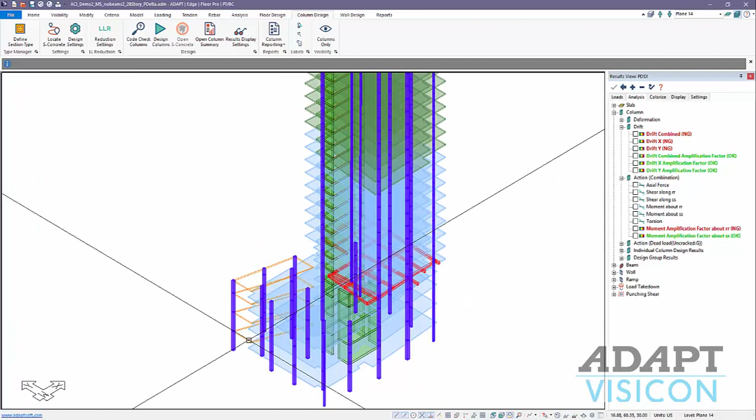We're going to go ahead and go to loading. Under load combinations, a user can now designate a combination as p-delta. In this example, we have 3 p-delta combinations listed here. There's a new analysis and design option type for p-delta, and you can see that here in this pull-down list.

The program will process p-delta combinations either as a batch, when you have repeating combinations, load cases included in those combinations and factors. So for example, we have PDM1, this stands for p-delta master 1, and this has factors of 1 for all of our gravity load cases. P-delta SX is for seismic in the X direction, and SY would be seismic in the Y direction as a simple example. Those also have the same identical factors for the gravity load cases. The only difference is they also have an extra load case included, 1 times EQX and 1 times EQY.

Because these 3 sets of factors and load cases are identical, this first combination is designated as a master combination, meaning the program will generate a geometric stiffness matrix from that combination and then apply it to the solution for these 2 combinations.

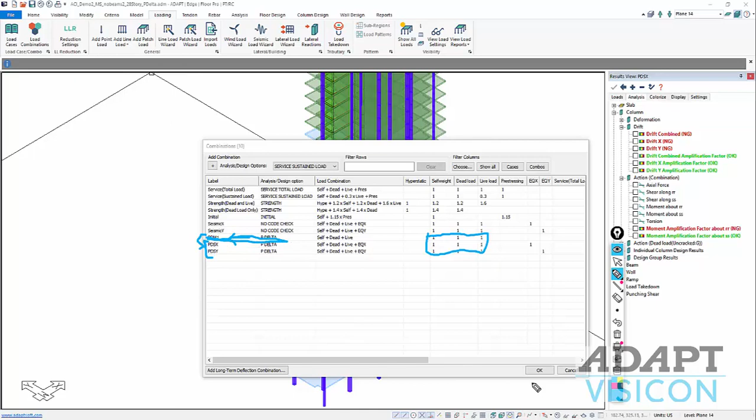If you want the program to uniquely solve each p-delta combination separately, we would remove the master combination from the list, and we would only solve for p-delta SX and SY. Each would allow the program to solve its own unique geometric matrix and then produce a solution for these 2 combinations. So these 2 combinations are sourcing this combination for the production of that matrix.

In designating p-delta as the combination, the program does not design design strips for p-delta solutions. Those are suppressed. The user can evaluate analysis results, which we'll talk about later, for p-delta in terms of drift amplification, and also moment amplification for columns. The user can design columns and walls relative to p-delta solutions.

So we've talked about how we set up second order p-delta analysis combinations. The next thing we want to talk about are results that are generated for these combinations, and those are drift and moment amplification factors. We'll go back to our model. We've solved this frame for p-delta, and you'll note under the result browser in the loads tab, there's a new branch called p-delta, which allows us to select, just like any other combination, one of the p-delta combinations.

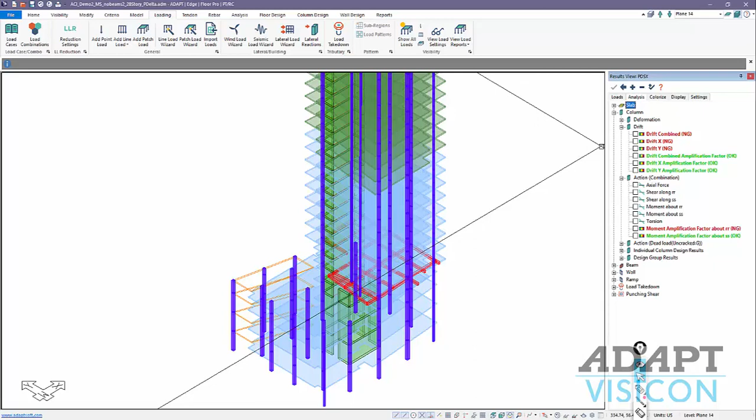For example, for p-delta SX, this is again seismic in the positive X direction following the global orientation for positive direction. If we select analysis, and I'm going to go over here to column design and look at only the columns, and we'll go ahead and go to single level. I'll navigate just to the top of the structure for simplicity. You can see for column results under drift, we now have options set for amplification of combined global drift, X direction drift, and Y direction drift.

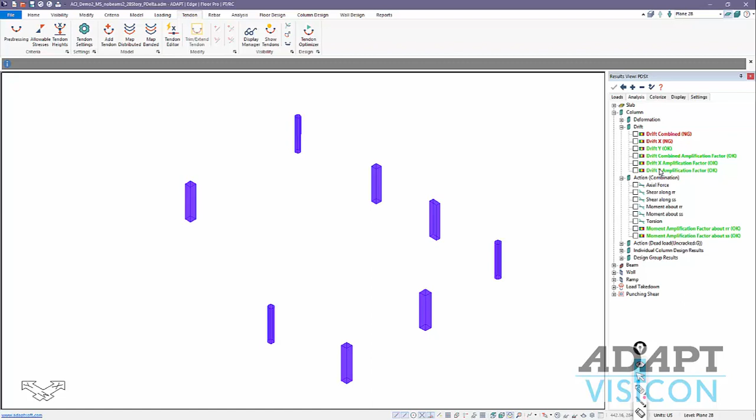The amplification factor is the ratio of the second order drift to the first order drift. So the program gives us an indication of that for each column, and it checks it against a user-defined value which is defaulted to 1.4. That can be modified both for drift and moment amplification in these 2 options here. You can see this is set to 1.4.

So coming back to the results, if, for example, I look at the X direction drift, the program will color code those columns which are acceptable and produce the maximum ratio relative to top and bottom displacements at the particular level for drift from second order and first order results. Those are just graphical results that can be had using these new options.

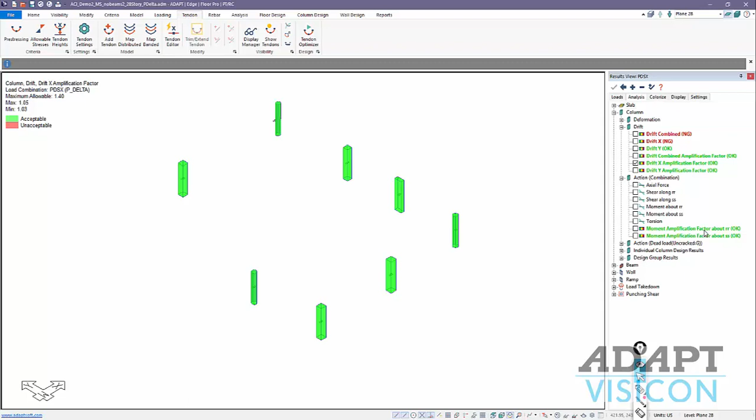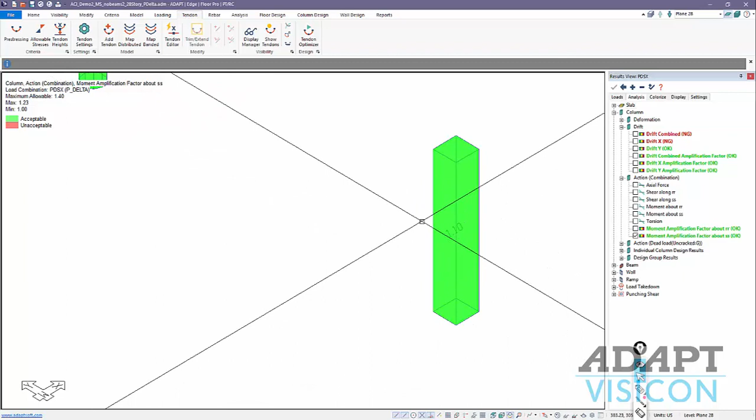Additionally, we have moment amplification factors about RR and SS directions. So the primary driver for seismic in the X direction would be bending about SS. We'll go ahead and turn that on, and we can see again we have moment amplification factors. The program produces a second order to first order ratio of moments at the top and bottom and reports the worst case here as a ratio. If it's greater than the threshold 1.4, it would be flagged as red. If we go ahead and turn on the entire set of columns, you can see amplification.

There's one location where it's flagging this as 1.44. If I go to the other direction and just zoom out, there are additional locations that are flagged. These are, again, just graphical results relative to those p-delta combinations.

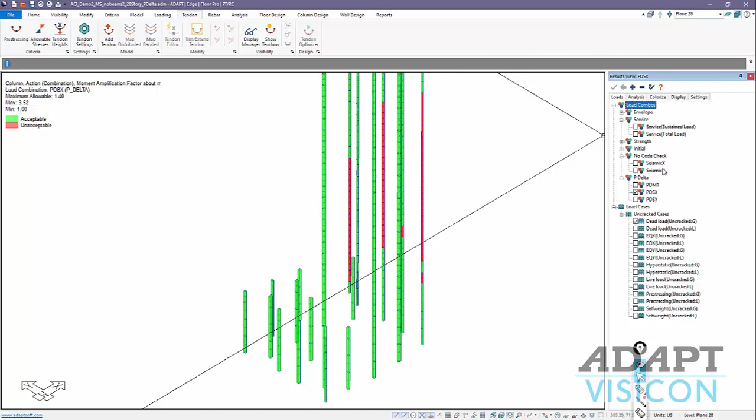If you select a combination that we would consider a regular combination, for example, under no code check, we produced essentially the same repetitive combos but without p-delta. If we turn those on, you can see these are grayed out and the check becomes not applicable in the result tree. We're going to go back to our release notes document.

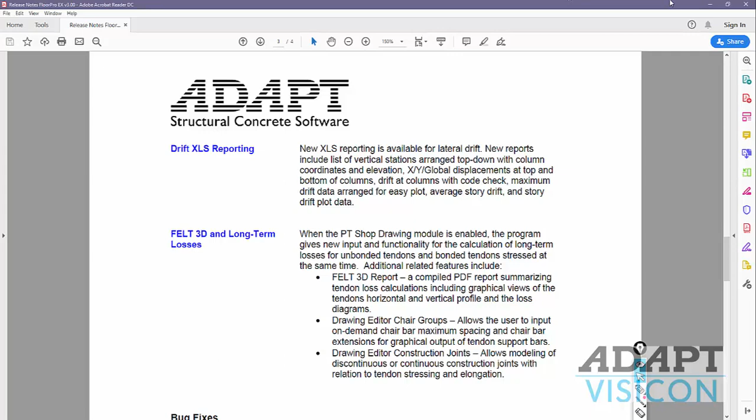I'm going to jump all the way down here to this option for drift reporting. This is linked to p-delta and just drift in general. In the program, if we have run a global frame and checked drift graphically, there are also new options for drift output in XLS format. Under reports, analysis data, under drift report, the program opens a dialog.

You have the ability to select the combinations you want to produce a report for. In this case, I'll produce it for just one combo. We'll do this for the p-delta in the X direction for seismic. And we can also input our allowable that we want to check against within the XLS report. This has no linkage back to the graphical report; it's only produced for the XLS report. And then the amplification factor, again, no linkage back to the graphical check.

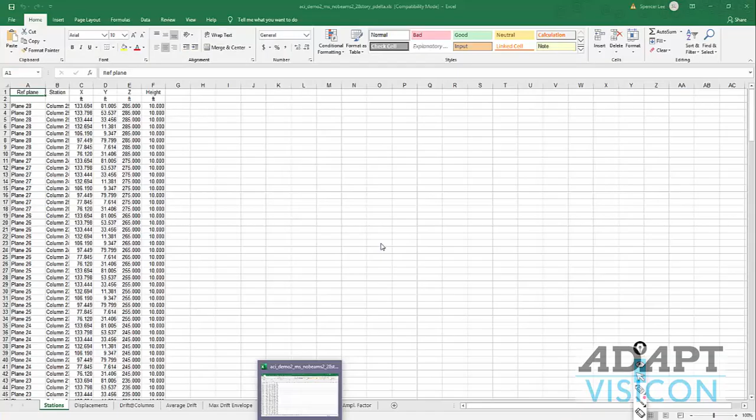If we select the direction, we can look at unidirectional results, X and Y separated, or combined results. We'll just look at all three. I'll select OK, and the program will launch a new XLS report. Okay, and this is the report. There are several different sheets here. I'll describe each just in summary.

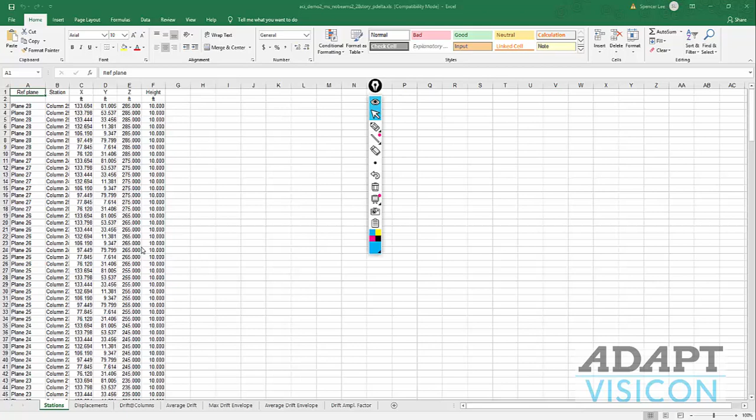We have stations which are referenced from top to bottom in the structure. So this will list all of the columns at each plane and the column coordinates along with the heights of those columns. This is a good reference if you needed to pull out coordinates of those column locations aside from just the drift reporting. The program also reports displacements for each of the columns.

So you can see for each plane, each column is listed, the load combination is listed, the type and designation, and then we produce the displacements X, Y at the bottom and top, as well as the combined displacements. These are just raw displacement results for the combination that you had selected.

Drift at columns: the program will show drift in X, Y, and combined in this case for the same combinations and the same column locations and the percentage. So this is the actual interstory drift, the differential drift for the direction or combined. This is the percentage relative to the story height, and this is checked against allowable. If any of these three exceed allowable, the program will flag it as no good, or okay if it's less than allowable.

The average drift takes the average of all columns at a level, so the program would report that per plane. You can see we have planes 2 through 28. This is again X, Y, and combined, the percentage relative to the story height, and then the code check versus allowable. Maximum drift envelope: this will just produce the report of the maximum drift in the X, Y, or combined direction against allowable.

Average drift envelope: again, we look at a reduced report for the average drift of all columns in the story. And then we look at the drift amplification factors. So for each column location, we have a percentage of drift amplification against an allowable. This is just a tabular format of what you might check more formally in graphical form.

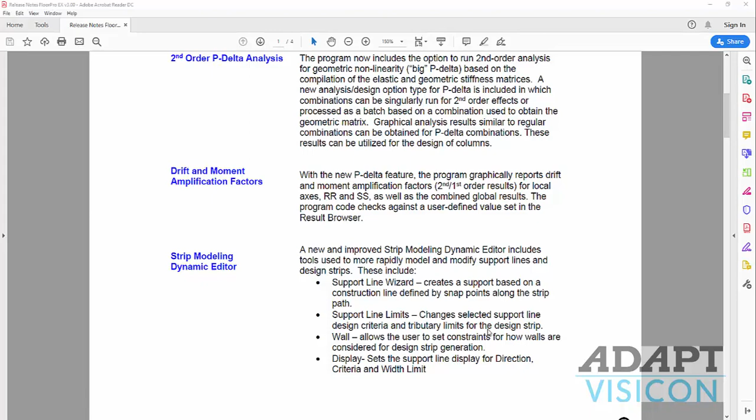We're now going to switch gears and talk about the strip modeling editor, the dynamic editor, and how that has been improved. We'll also talk after that about splitters, how splitters are now redefined and used to allow for more efficient creation of design strips. So in this model, I'll go ahead and reset the view. We're going to go to single level mode, and I'll work down here to level 3, for example.

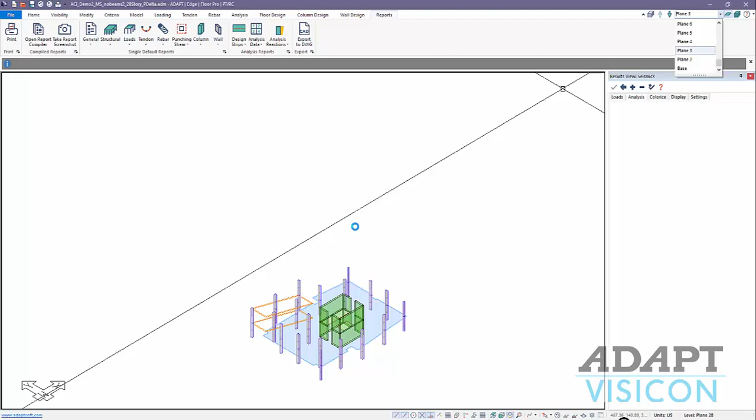At level 3, if you import a new or an existing file into the new program, our recommendation is to remove all splitters from that file. Leave your support lines, but remove splitters, because the definition and the use of splitters has changed quite dramatically from previous versions of the program. So in this case, we're going to go ahead and just delete the design strips.

I'm going to turn on my splitters, and we're going to go ahead and select by type. I'm going to remove the splitters and the support lines. We're going to show this dynamic editor just in pure form, using it as if this was a newly created model.

Okay, so we'll go to floor design. The new tool is located here under strip modeling as dynamic editor. Now the user can always generate design strips in X or Y directions using X and Y tools. This is similar to the previous version. You're not required to use the dynamic editor.

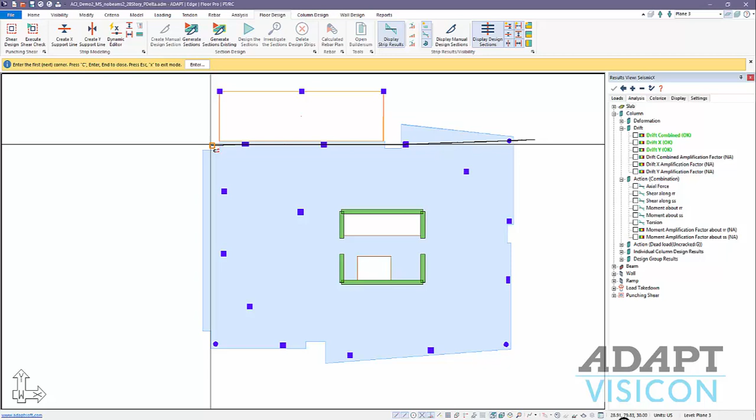For example, I can select X. I can go ahead and just create a strip like so. The program, in this case, since I started and ended the support line outside of the slab, it leaves that point there. So you may have to edit that if you want it to be a cleaner entry of the support line. I may have to use the snap to endpoint or snap perpendicular to pull those lines back. Okay, so these two tools work essentially the same as what you had in previous versions.

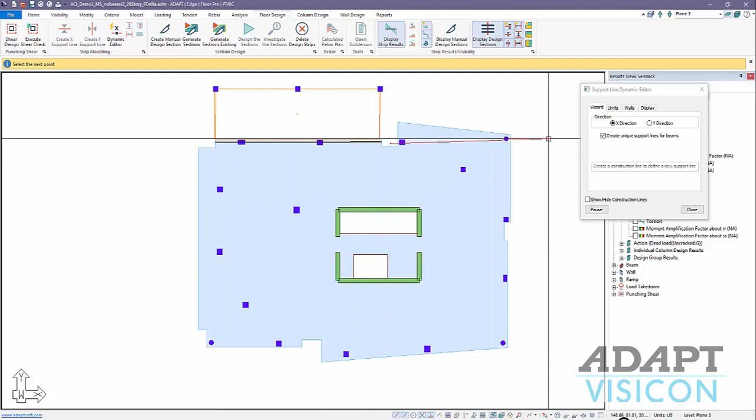If I now use the dynamic editor, there's 4 new tabs in the editor. We're going to start with the wizard. If we go to X direction, we're going to start here using our construction line, and as long as that goes through a column, it will scan and pick up that point as part of the strip. So if I end it here and press enter, it will truncate the support line to the slab edges and reduce it back. Same here, and notice I'm kind of just picking between the columns.

Here I can put intermediate click points to change the direction of the construction line. If I click on the endpoints or near the endpoints of walls, it will scan that and pick up the 2 endpoints of walls, like so. I'm going to go ahead and just add one at that location. If I click near the endpoint for a perpendicular or a wall in the opposite direction, it will pick up those points also.

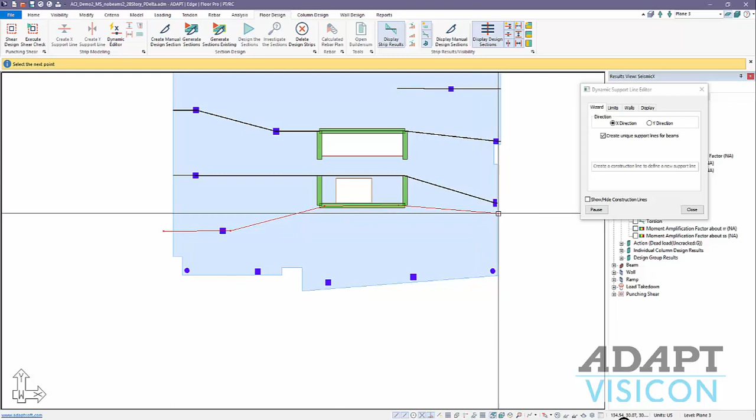Now notice what happened here. This ended the line there because I terminated that point. I'll pause it. I can just delete that. I can resume. So this pause resume gives you a nice capability of modifying support lines if you make a mistake. And then we have something maybe like this. Finally, we'll do 2 more down here in the X direction, like so. We're going to go ahead and close that for just a moment.

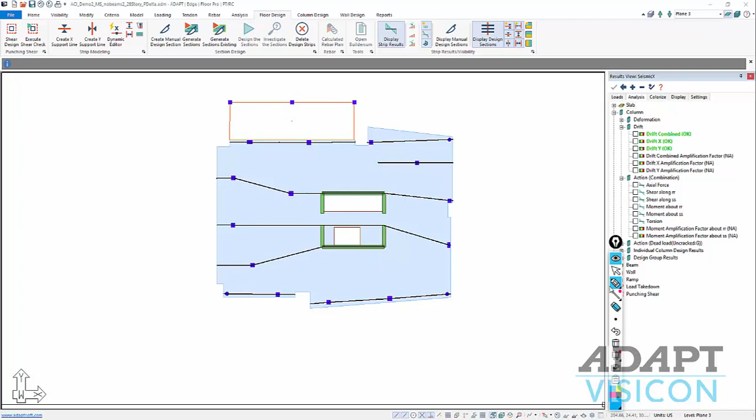Now, in previous versions, we would need splitters at a few locations. We would need splitters likely here. I would need a splitter wherever our support lines stop inside of the slab region. We would need these splitters, and then we might need splitters to bound off these openings. So we'll go ahead and leave all splitters out of this. I'm going to generate the design strips, and we can see the program can now more intelligently detect where the support line starts and stops, and it can produce the strips without any need of splitters bounding the edges, start and end of a strip.

One thing that the splitter is useful for is being able to terminate the width of a design tributary based on just a simple input of a splitter. For example, I don't want this to extend into the opening, so I'm going to add a splitter just here arbitrarily and maybe there. We'll go ahead and delete the strips. I'll use my X splitter. I'm going to add a splitter there, and I'm going to add one here. Once I'm done doing that, I can generate the strips again.

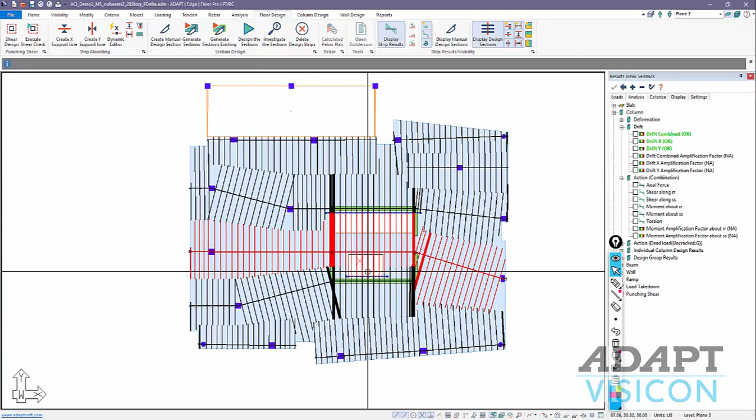And you can see this strip, because it goes through this region, extends down to the splitter. This strip extends up to the splitter, and vice versa on the other side. Okay, I may need to add 2 more splitters to completely release the strips from extending over the openings. But again, the splitter input is quite simple. If we go ahead and just add 2 more splitters, maybe I add one here, and I add one there. And now we have a nice arrangement of design strips in the X direction.

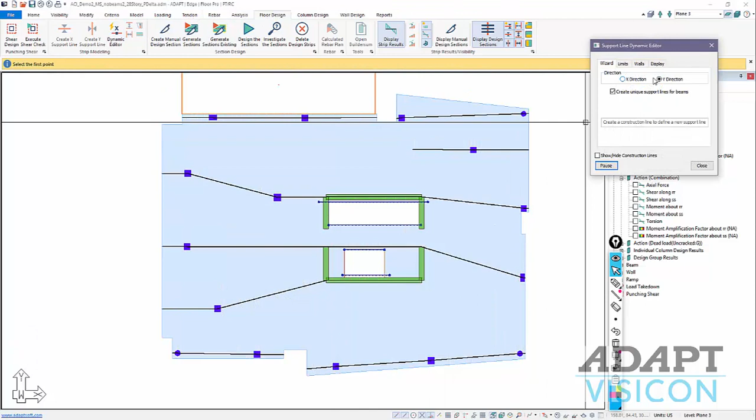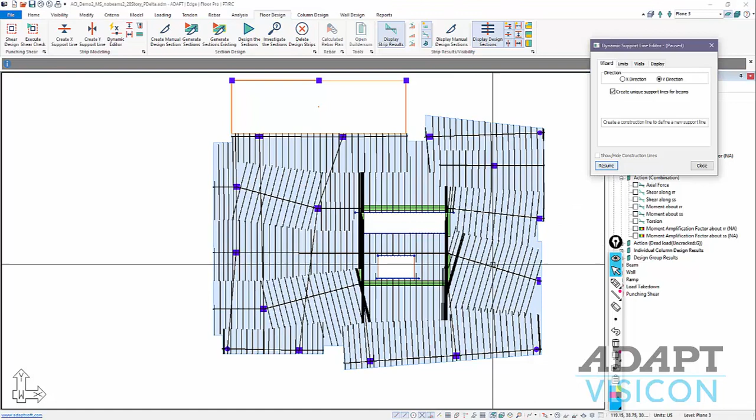I could come back to the dynamic editor, and I'm going to now do the Y direction. So the Y direction might look something like this. I'll snap near this point, near that point. Same thing here, near one endpoint, one on the other side. And again, here I did not continue, so let me go ahead and make that modification. I'll just delete that. I'll resume. This is point 1, point 2, and let's say point 3 and 4.

And then we might have one along there. I'll close that. Now we don't need to see the X direction splitters here, so I'll go ahead and turn the splitter view off. I may want Y direction splitters, so I'll preemptively add those.

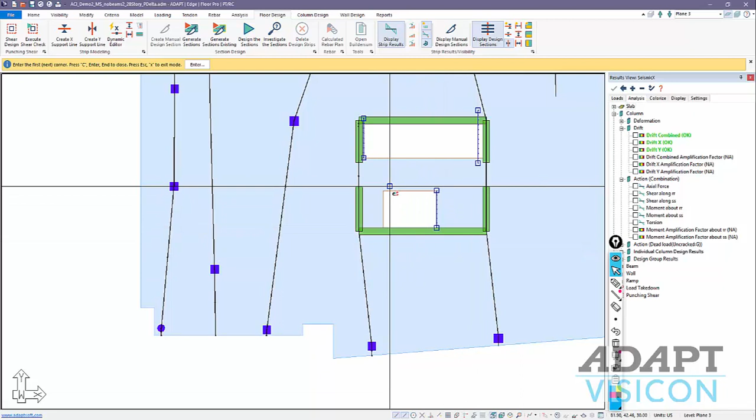We're going to add one here. I can have more precision if I use snap tools. I could maybe add one there, closer to the wall. And if I use the actual points of the opening, I can get quite precise in where the splitters are placed, something like that. We'll go ahead and generate the strips.

After producing those strips, we'll just isolate this Y direction, and now we have design cuts that look like so. The new strip tools are very nice and very easy to use for generation of strips more rapidly than previous versions. One thing to note is if I was to close this model and reopen it...

We're going to reopen this in RC mode. Okay, we'll go back to level 3. And if we go to criteria under analysis and design options, we notice that for conventionally reinforced only RC slabs, the middle strip option has been removed.

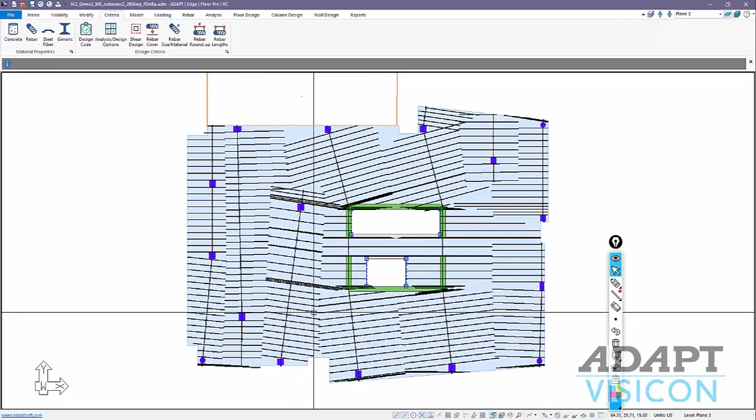This was required to allow the new functionality to work as intended during the implementation. So for middle strips, the user would have to actually create support lines for those middle strips manually. But with the new wizard and new ability to do that, it can be done quite rapidly, so that functionality will likely be restored in a future version, but in this first release, that functionality is removed.

So if I, for example, wanted to add middle strips in this X direction, I can very easily do that again using the wizard. I could just create strips like so. There's middle strip 1. We might have middle strip 2 there, maybe middle strip 3, 4.

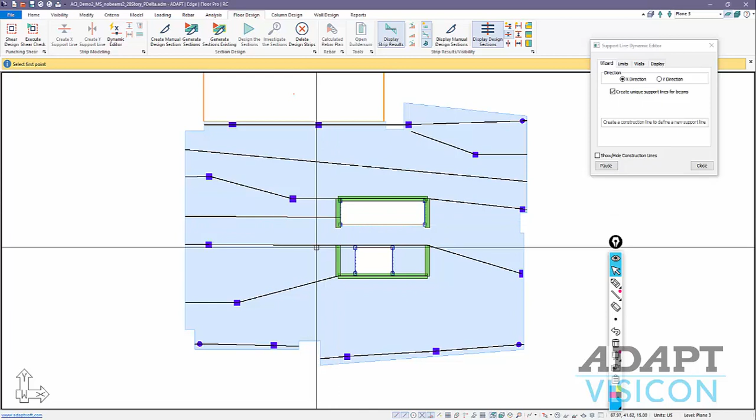There's 5, and there's 6. In doing that, we get some layout of strips that may look like this. So middle strips can be done using the wizard, or again manually through creating X and Y direction support lines.

We'll go back to that dynamic editor, and the second option in the editor is limits. The program allows us to modify support line designations more quickly versus just going in and double clicking on a support line and changing the modifications there, so we can modify design criteria.

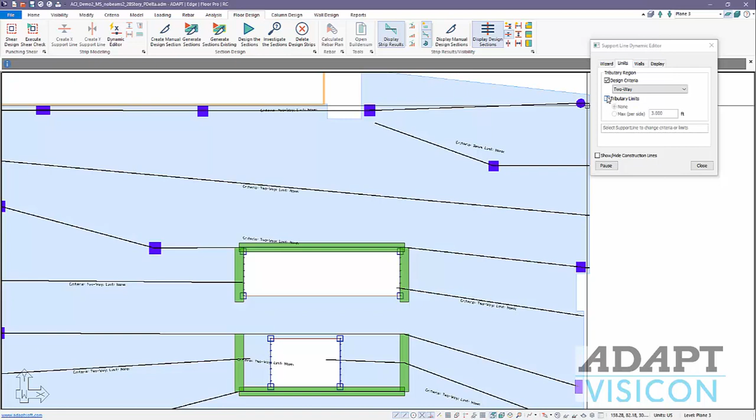For example, if I wanted to change this to one way, I would just change it through clicking once, selecting this option. You could also window select, so this gives you a little more control over modifying more than just one support line. You can also define tributary limits using this window, as well as a double click.

If I pause this and double click on this strip, these same options for tributary limits are shown under Design Section Options. You can see a few new things here. Number one, the program allows you to either enter the maximum number of sections per span or generate a maximum section spacing with minimum number of sections, which is the new default.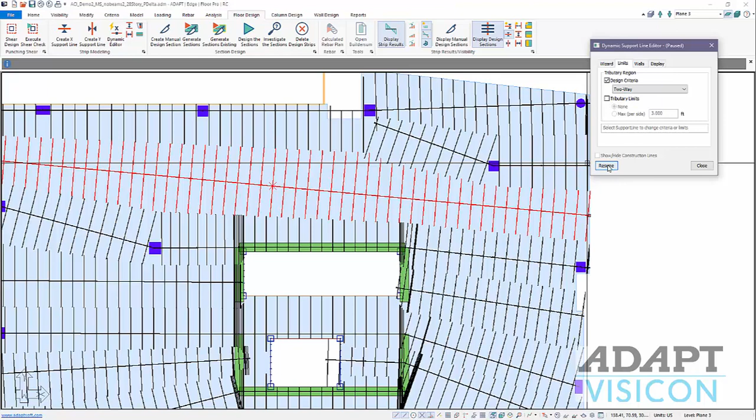Tributary width limits - if you wanted to limit the tributary per side, maybe I want to limit this particular middle strip to 2 feet per side, I would set that here individually, or I could set it through this option here in the dynamic editor.

If we go back and generate the strips again, and I'll isolate that X direction, you can see that's been limited to that value. This does not stretch down, we just simply limit this to this particular value.

Now if I put a splitter along here, the program interprets that splitter. So if I just say, well, I want to add a splitter along this path and regenerate the strips based on the splitter and that input for maximum tributary width, now you can see this cuts down to the splitter, this cuts down to the splitter, and this 2 feet still is imposed on that support line.

I'll remove that splitter and let's set this back to none for the tributary width limit, and we'll just regenerate again to restore what we had previously.

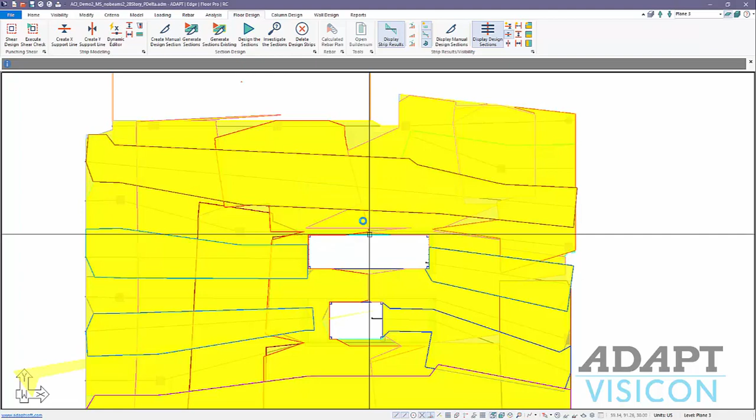Okay, coming back to the dynamic editor, the third option here is walls. How do we go about generating section cuts near walls? You can see that there's some auto options here that are already set. This is pertaining only to the wall as how it's defined in terms of a boundary for design strips.

So for example, this line here says it's a Y only boundary. I want this to be an X boundary. If I change this, for example, to X boundary, I'll just do user defined. I'm going to go ahead and click on that wall as an X boundary, and I'll close it.

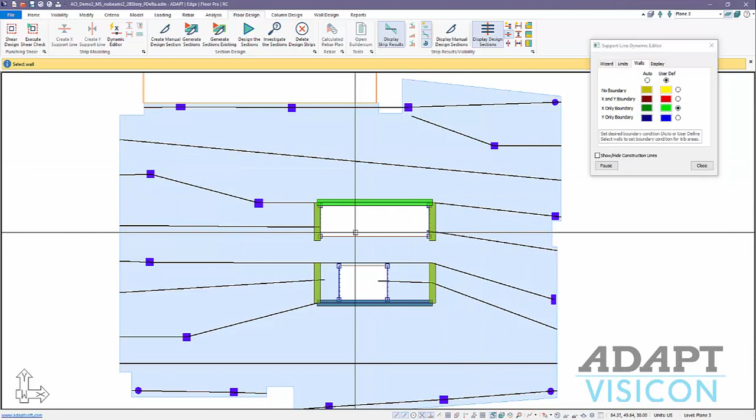If I generate the design cuts, this is a mechanism used to allow the program to generate strips and how they interact with walls. You can see this design cut here extends all the way down to the newly imposed X boundary, and there's a tiny gap between those. This allows us to control how support lines interact with walls, so that we may not want the support line section to cut over the wall but just go right up to the face of the wall.

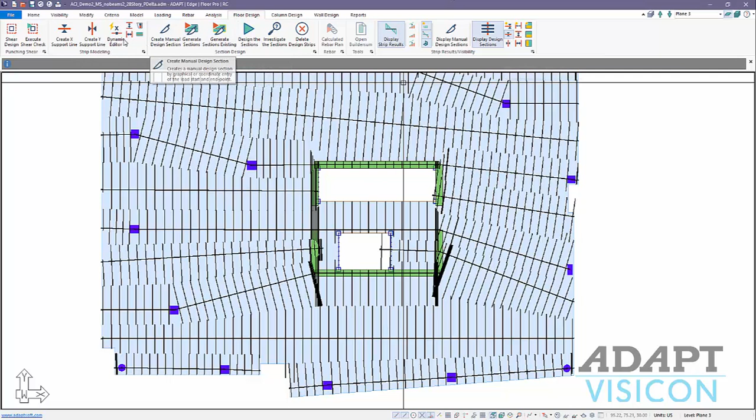So this allows control over that type of arrangement. If we go back to our assignments here, if I want that to be an X and Y boundary, we'll go back to user defined. I want this to be X and Y. I'll click that, that changes it to X and Y.

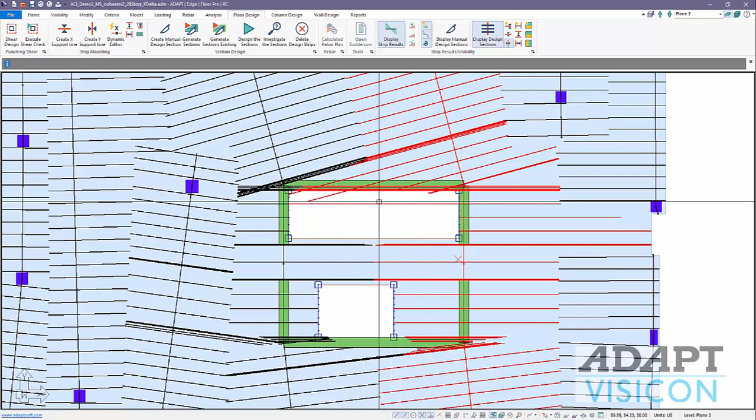Now if we look at the other direction, these design cuts that extend over this wall are now going to be trimmed back, because it's also being used as an imposed Y direction boundary based on the rule that I assigned. So I can generate this again, and if we isolate the Y direction, you can see these cuts along that wall get trimmed back against that wall.

Let's go back to Dynamic Editor. Again, this just allows you to control wall boundaries. If you don't want any boundaries for walls, you can always go through and just tag all of the walls as no boundary. Otherwise, the auto assignments would be generated. You can see there's a few no boundary. This, for example, is currently no boundary. This is currently user defined as an X and Y boundary, and then this is defined as a Y boundary only. So the last thing is display.

We can simply control display of properties of support lines using this option. So I can display the criteria, direction, limit, and if you update, it just shows us those different values on the different support lines. So just easier ways to control visibility of characteristics of a support line versus double clicking and having to go into the properties of the support line.

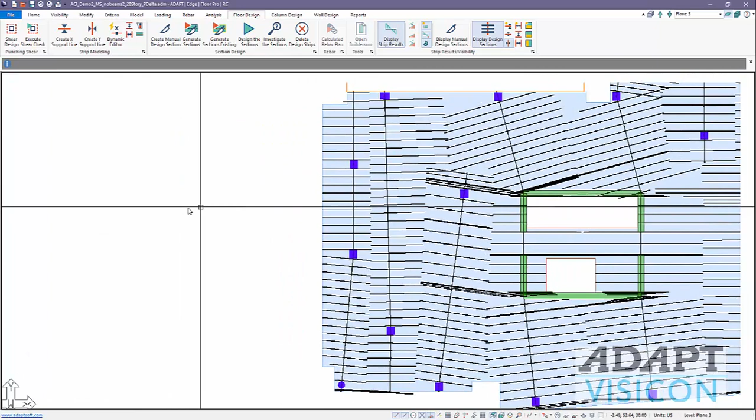One additional thing to point out regarding design strips is beams. How does the program treat beams when we use the dynamic editor to snap on beam locations? So we're going to add a beam along this line. I'll go over here to model and we'll just say I want to add a beam from point A to point B, and I'm going to delete this strip.

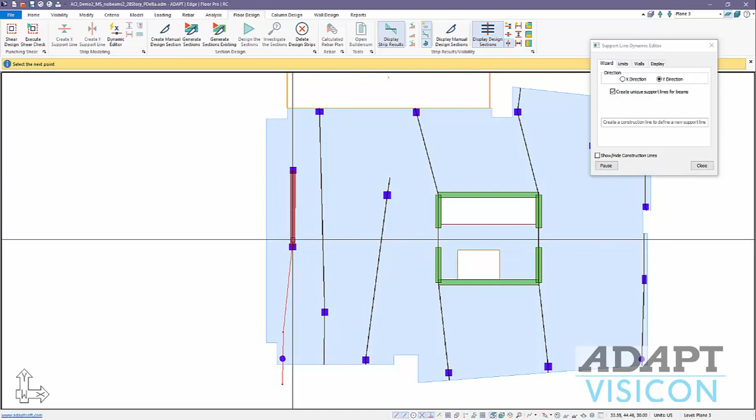I'll delete out the design strips for the model, and we want to talk about how this beam is treated using the new options for the dynamic editor. If I use my dynamic editor, and let's say I go from through this column, through that column, back through that column, and then over to the edge, and I'll just close that, you can see this is a continuous support line, and it takes on the characteristic of a two-way slab by default.

So we would have to rely on previously implemented mechanisms to design that beam. The program recognizes that there's a beam there. It will design it according to beam requirements per code, but all of the reinforcement that's linked and used for the design of that beam, the sizes, are based on whatever settings we have under the criteria options for rebar size and material. So two-way slab, we have 5s and 8s.

For beams, we actually might want to use number 9s, for example. So the program, again, designs the proper amount of area of steel, but the rebar assignment to the beam takes on the characteristic setting of a two-way slab size, these sizes here. If we want more explicit control of that being labeled as a beam, we can do that using the new editor.

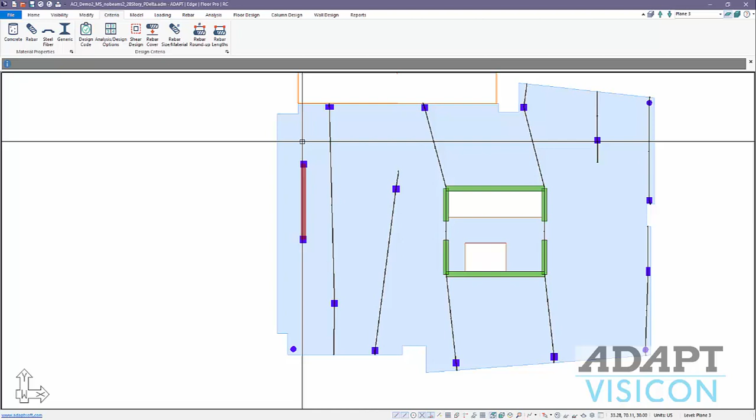So I'll go back, and now I'm going to go ahead and just snap near the endpoint of the beam, like so. And in doing so, the program automatically breaks this up. This is now a two-way slab. This becomes a beam, and then we have a two-way slab. Okay, the beam characteristics can take on

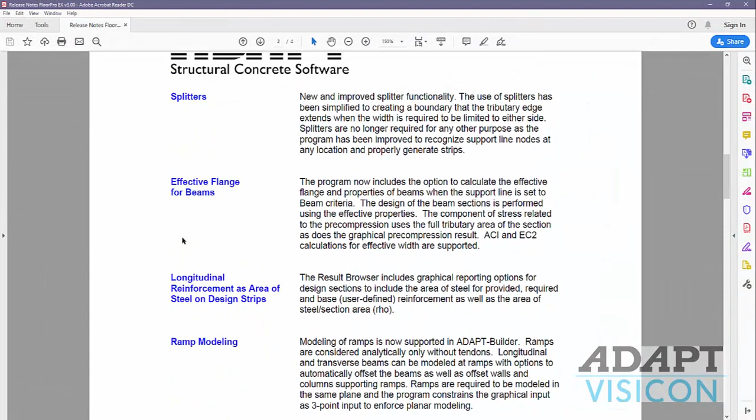two additional options here. When we have a beam, we now have the option for effective flange width as beam criteria. So we've talked about the dynamic editor, we've talked about splitters. Now we're getting into the effective flange for beams. You can see this option here for effective flange that we just showed under the properties of that beam.

Now to fully explore this, we're going to actually go up to level 6. This beam here, we've just manually created the X support line. We've labeled it as a beam design, and we are going to use the effective flange width option. What does this do? This allows the program to use the effective properties for the calculation of reinforcement for the design cut, as well as the stress component, the top and bottom flexural stress.

If we look at simple bending theory, we might say the stress is equal to M over S plus P over A. Well, the section modulus used, or I over Y used, are those based on the effective properties of the beam section when this is used.

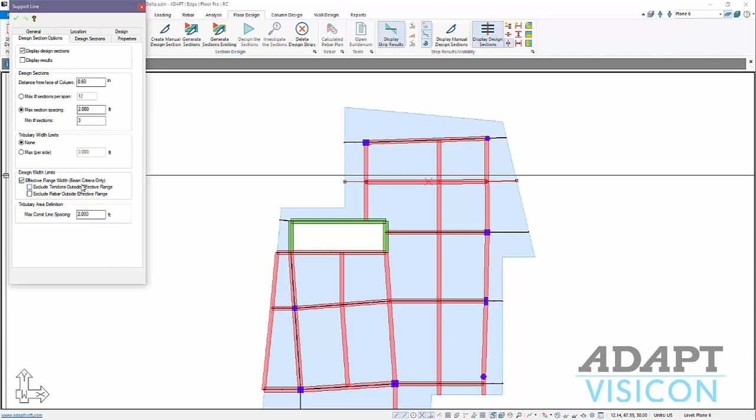The area is using the full flange based on the modeled design strip. Let's look at that a little bit more. If we generate the strips, we would consider this width from here to here as the full tributary, full T.

When we design that strip, if I take that strip and design those sections, the properties used for that particular section cut are the effective properties, not the full properties. That's reflective in the dialog that shows us the section cut properties when we design a series of sections linked to a support line.

Coming back to this design strip, under design sections the length is set to 162, and B effective is also 162, with a bit more precision reported. If I go back to design section options, we need to make sure that's updated before we apply it. Once updated, let's design again to see the reflection in the properties dialog.

Coming back to that, you can see now the physical cut is 162, the effective flange is 122.8, and this follows ACI and European code implementations of effective flange. Those are outlined in more detail in the new features supplement manual, which can be linked from the help menu up at the top right.

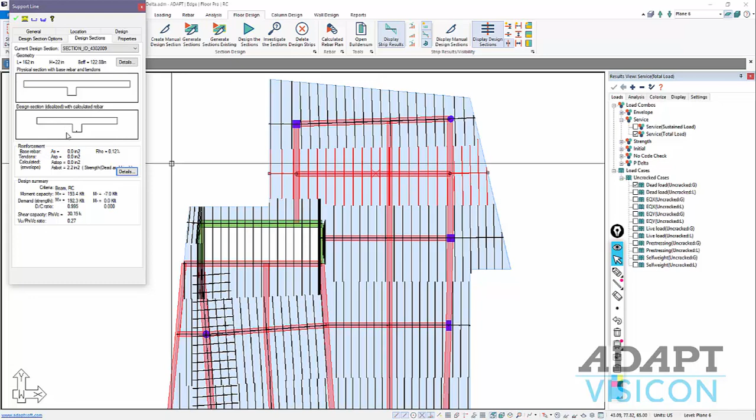As the user, you can also designate whether or not you want to exclude or include the tendons and reinforcement for the design of the section. So any reinforcement or tendons that physically fall outside of the effective width can be used or excluded depending on the user's input. By default, we include them, and the user can control whether they are excluded using these two selection boxes.

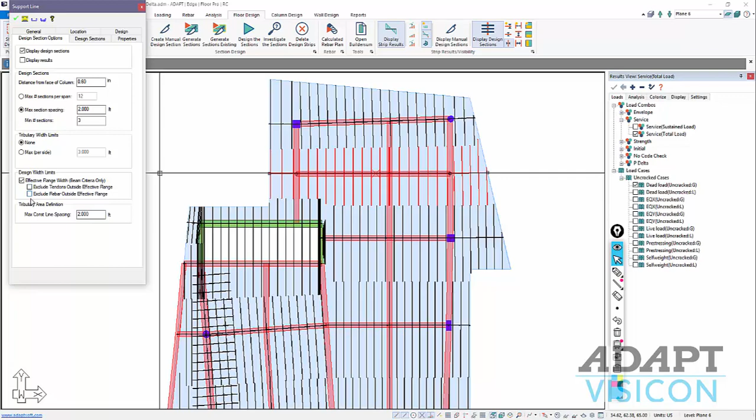For design strips, the program now reports graphical area of steel. That's this option here, longitudinal reinforcement as area of steel. In the program, this is represented through use of the result browser.

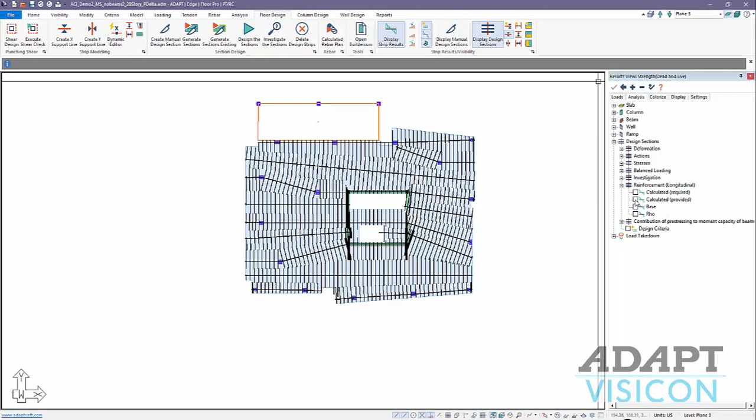If we select a combination, for example strength, dead and live, and we've produced the rebar plan, we've already calculated the rebar for that combination. We can now review calculated as required, calculated as provided rebar, any base reinforcement, and then the area of steel. For example, the required rebar for strength, dead and live is represented by these graphs—green is top rebar, blue is bottom rebar.

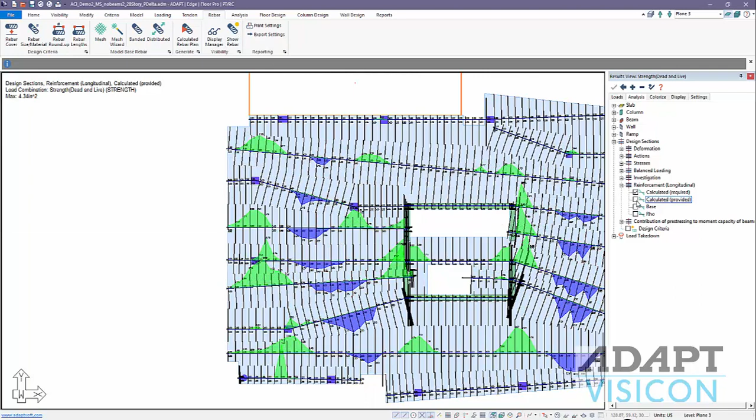If I turn on the calculated rebar plan, let's go to rebar and display it. This shows us the actual bars on plan with the graph, so those should match in terms of location. If we go to provided rebar, this is what the program is actually adding as provided rebar in that section. There may be cases where the required rebar and the provided rebar contain a gap.

Like here, we need 1.58 provided—that's what we're adding to the slab—and we only need 0.9. That means minimum reinforcement may actually control at that particular location. We can also, if we have any base rebar, show the base rebar and also the percentage of steel as a function of the section area along these graphs.

The next two features we're going to discuss are ramp modeling and also beam offsets. This is a necessary improvement to support beams that are modeled at ramps. To do this, we're going to create a new instance of a model.

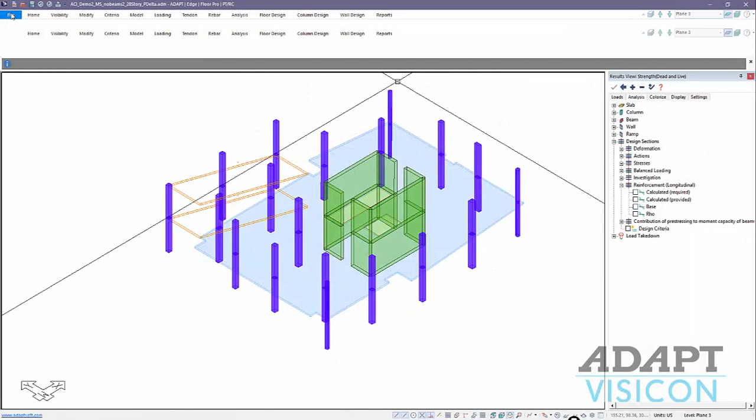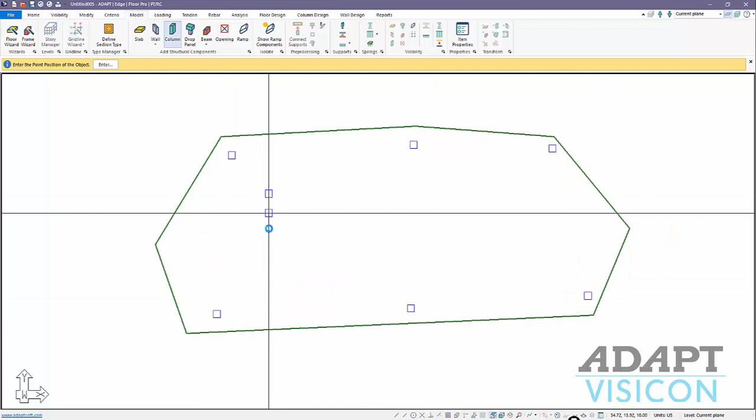Let's go and create just a simple model. I'll model just a slab and a few columns, and let's say in this we're going to have a ramp, maybe that goes from there to there. We have the ability now to model ramps using this option found in Model, Add Structural Components.

So this ramp starts at these two points, these columns here—point 1 and 2—which define the top of the ramp. The third point I'll say is here, and notice once we select the third point, this becomes locked. That allows the program to maintain just a planar ramp, which is a limitation where we have to model these as planar elements. So this becomes our ramp component.

I'm actually going to move that column there, and I'll move this one just to the midpoint of the ramp, and this one also to midpoint.

Okay, so we have this ramp element. A couple of things to note is under visibility, we can see the ramps if we go to a solid model. The program does not cut out the slab over the ramp. That requires us to add an opening.

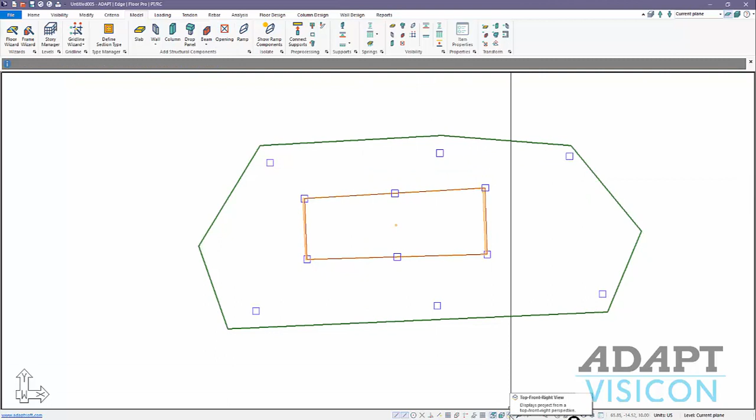So we'll add an opening right on top of the ramp, like so. If I use the 3D view option, top, front, right view, this warning will appear saying the view may not show the overlap of the ramps properly, so you may have to go back to the rendering. Looking at our rendering, we have something that looks like this - it's just a simple ramp.

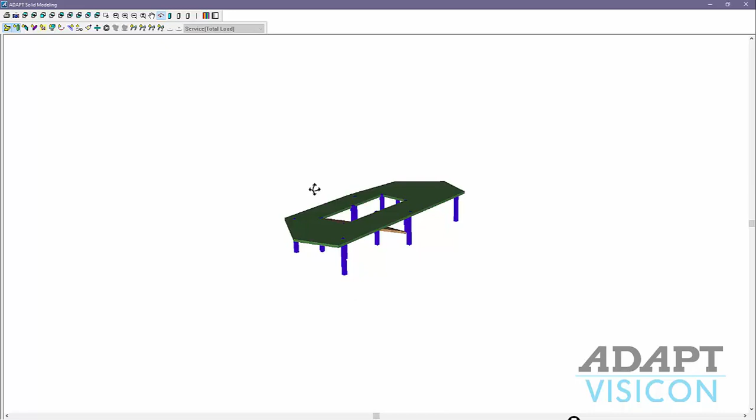And it may be required for continuity of a lateral system that's a moment frame, versus using workarounds that might be more applicable to earlier versions of the software. So we've modeled this ramp.

A couple of other things to note: any beam connected to the ramp or column can be offset downward and connect automatically to the ramp. So if I model, for example, a beam along here, let me make sure that snaps. And if I go back to my 3D view, that beam is actually modeled at this reference plane. If I select the beam, there's a new option under pre-processing that connects with the ramp, which drops that down to the level where it should be intersecting with the ramp, like so.

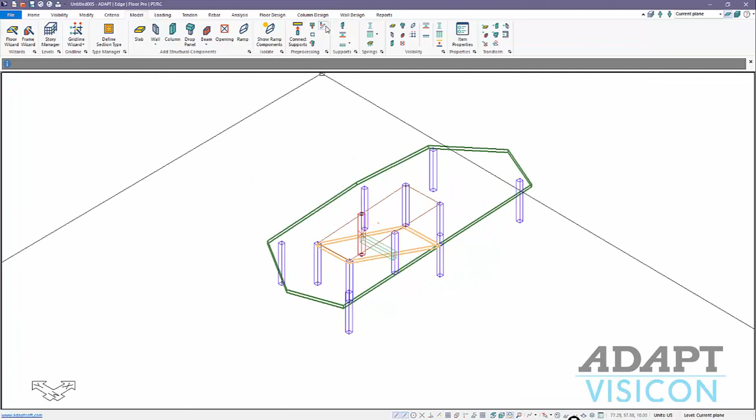You can also drop columns down. So if I select, for example, this column and I use connect with ramp, this column would drop down as well.

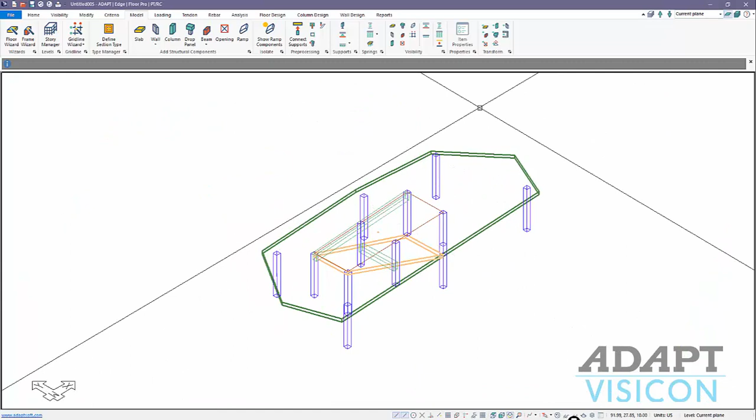Okay, we can also model longitudinal beams along the length of the ramp. If we had a beam, for example, that went from here all the way over to there, and coming back to this 3D view, that's also at the active plane, which is the current plane in this case. I can select this and align it with the ramp.

Ramps can be copied just like any other component. If I select all of this, I can copy that using modify vertical copy up one time, and we now have two ramps, basically identical slabs. Let me make sure I'm in multi-level mode to view that, like so.

The ability to slope columns, or beams rather in this case, requires the ability to support offsets at both start and end point of the beam. So for location, you now have the ability to model beams really as braces. You could apply this to something other than just ramps - you could have a sloped beam member in a model using these offsets.

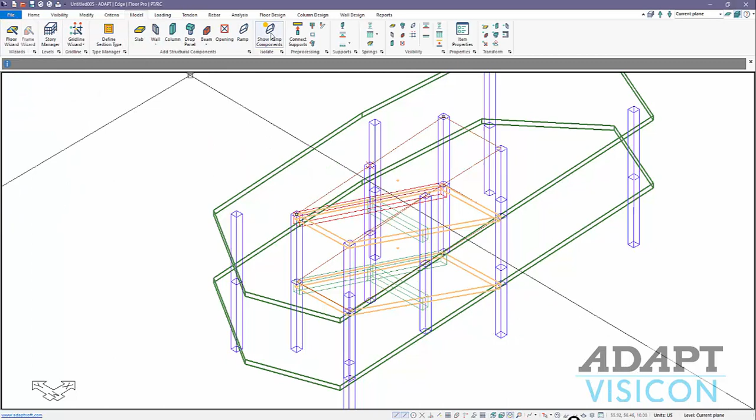Okay, back under model, there's a third option relative to ramps: show ramp components. If we go to a single level, for example, this simply just shows the ramp components in isolation and connected components. I can always go back to the default display using this option. So that isolates ramp components for viewing if you needed to quickly review how the ramp looks or how it's modeled.

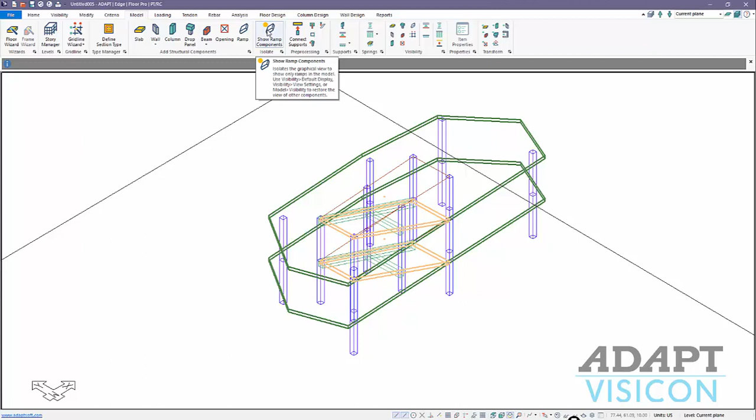Now, for ramping, ramps number one cannot be designed - we can't add a support line and design the ramps - and also tendons cannot be modeled in ramps. So those are two limitations relative to ramps. It's important for the user to understand how that applies to design strips.

If we look at a section cut this way, that might lead to geometry where we have the upper slab and then the ramp slab. And when we combine this plus this into an idealized section, we may actually get something that looks very deep - it's just a solid chunk of concrete.

So it's advisable for the user in this case to add splitters. We showed earlier in the video how splitters can be used and modeled very easily. I would just add a splitter along this, just slightly inside the ramp, there and there, or right on the edge of the ramp. And that isolates this area from containing any portion of concrete as part of the section cut.

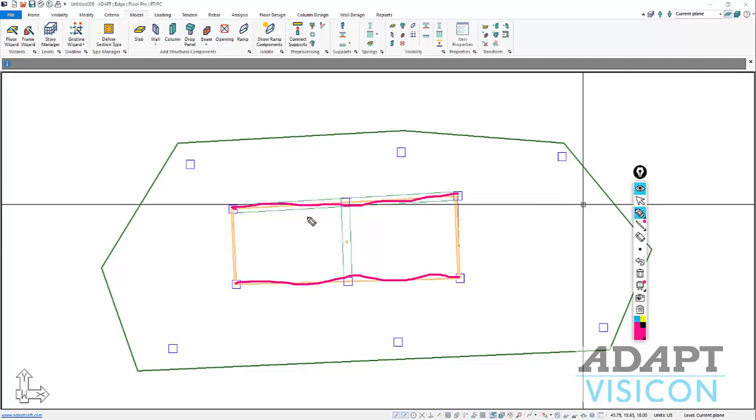In future versions of the software, we will add the functionality to design ramps. In the current implementation, their main purpose again is just for an analysis element, mainly for continuity of a lateral system. If you needed to include a more precise way of modeling ramps, we now have this component.

There have been two new major improvements made to punching shear for Builder 2019, and these mainly include the ability for the user to check critical sections based on an octagonally shaped boundary or critical section. We have some code references here outlining this. For ACI, this applies only to ACI in the current implementation - all versions of ACI 318 in the program, that's version 14 all the way back through 99.

And we also have included the ability for the program to check the minimum number or minimum rails, studs, or shear reinforcement for purposes of seismic drift. Again, a code reference is shown here. We're going to now show how these are actually implemented in the program.

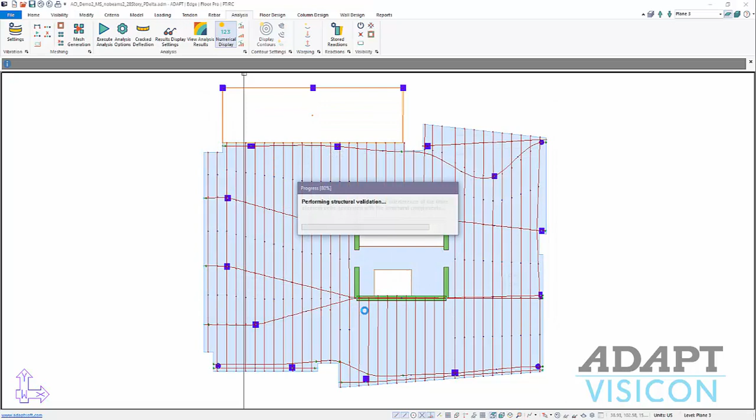We'll go back to our main model that we were using previously, and we're going to stick with level 3 shown here. This is a post-tensioned level, so we have post-tensioning shown. We're going to analyze the slab. So I'm going to analyze this just for one combination, strength, dead, and live, just to produce a result that allows us to check punching shear. Okay, we'll go back to our default display.

And under floor design, shear design, there are two new options, and I'll highlight these new options. The first option is to consider the critical section outside of the shear reinforced zone. The second option is to apply the check for minimum reinforcement for drift. I'll explain both of these now.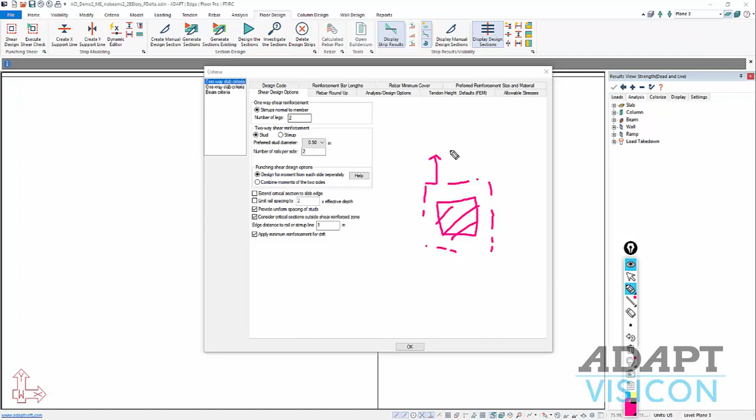For the first option, historically the program has checked a critical section that is rectilinear. So we have 4 straight sides. The program would check that out at d/2 spacing until you hit what we call a layer that requires no reinforcement. So maybe this is layer 10, and layer 10 yields the need for 0 amount of area of steel. Let's say that's the value for area of steel.

In the implementation with this new option of considering this critical section, the program determines that location. It then checks it a second time using the octagonally shaped section. So the program has input. If these are our rails, for example, this is an interior condition. These might be the stud rails. I'm just showing 2 for purposes of the demonstration. The user can enter the edge distance to the rail or stirrup line from the face of column. The critical section would then be based off of this shape here.

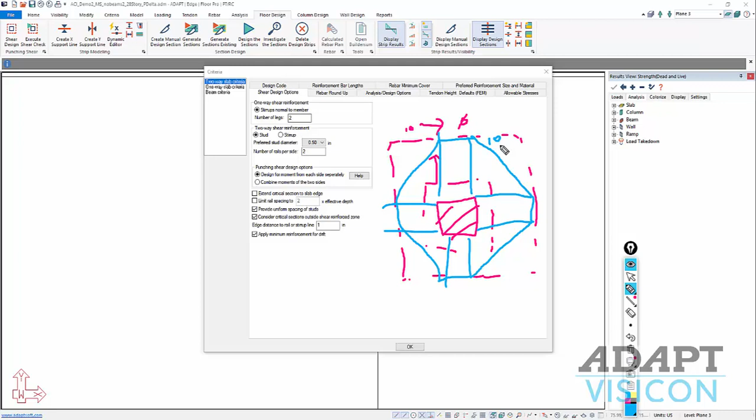Okay, and the program would check this layer again. So if this is layer 10, the program checks layer 10 again, and depending on whether or not the stress on that critical section, which is the least critical section based on this arrangement of stud rails, is less than 2 square root of f prime c per code, the program would no longer check additional rails and it would be acceptable.

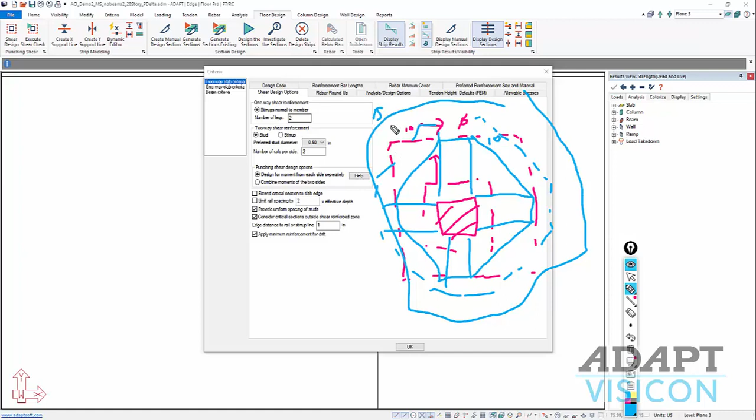If it's greater than 2 square root of f prime c, the program would then check multiple rails of this octagonally shaped critical section. So you might have an additional, let's say, if we go all the way out to here, 15 rails, or 15 layers rather. So the program would check additional critical sections with this new shape until that stress of 2 square root of f prime c is met, if it's less than or equal to that stress. That is what this option is for.

The user can select this. If selected, it will check those critical sections. If not, it would actually check it as previous versions of the implementation were done. This new option is meant to support the explicit need for checking the least critical section per ACI 318-14.

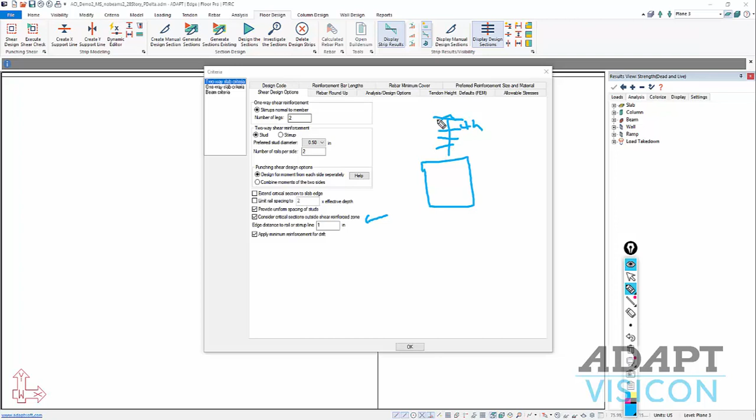The second check is applying minimum reinforcement for drift, and in this case the program will determine a distance 4 times the slab thickness. Any critical section that falls within this distance, this might be 5, 4, 3, 2, 1, any critical boundary within that 4h, the program will determine whether or not the area of steel is greater than or equal to 3.5 square root of f prime c. If not, it will add more rails for that particular provision of the code.

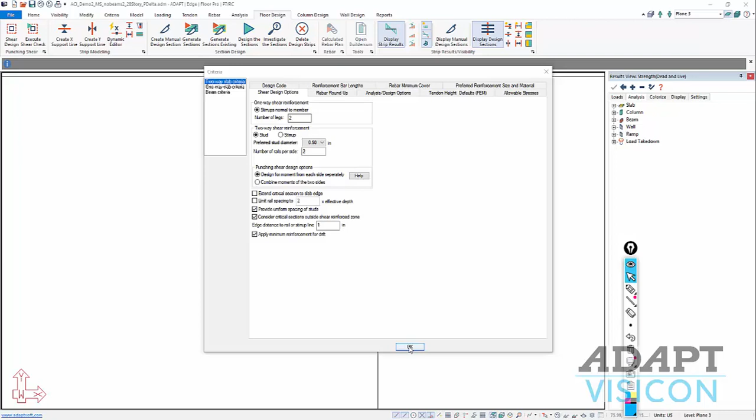Now the best way to check these two options is really in the details of the output. The program produces reinforcement, which doesn't obviously provide a lot of detail into the back-end calculations, but if we take this slab and I run through the shear check for the slab, over here in the design results, if I select a strength combo under punching shear, I can produce, for example, a stress check. Grid D2 requires reinforcement, and I can easily check the graphical arrangement of the reinforcement here.

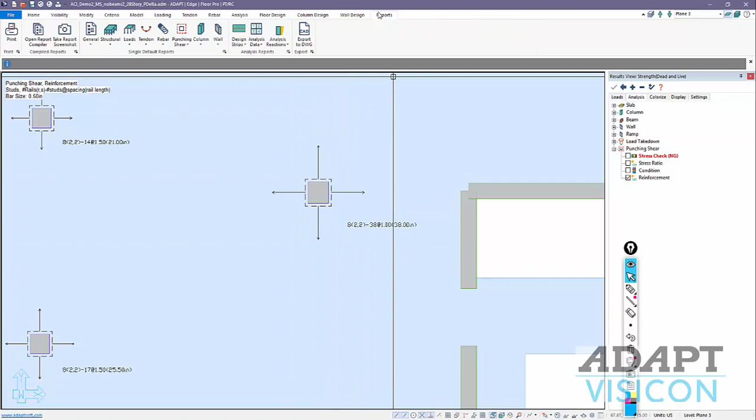I could compare this output to turning off or on the octagonally shaped section, which is again the new option, or the seismic drift section. So if we look at the details of this actual design of this column, we can go back to reports, punching shear, XLS, this gives us more detail into what's actually happening at that section. If we look at grid D2, just navigate down, that's this block right there.

We can see that this is the critical area. Column L is the critical section area. You can see that builds and builds and builds until section 5. At section 5, the critical area is 1425 square inches. It then drops down to 1226. That indicates that is the location where we transition from a rectilinear to an octagonally shaped section.

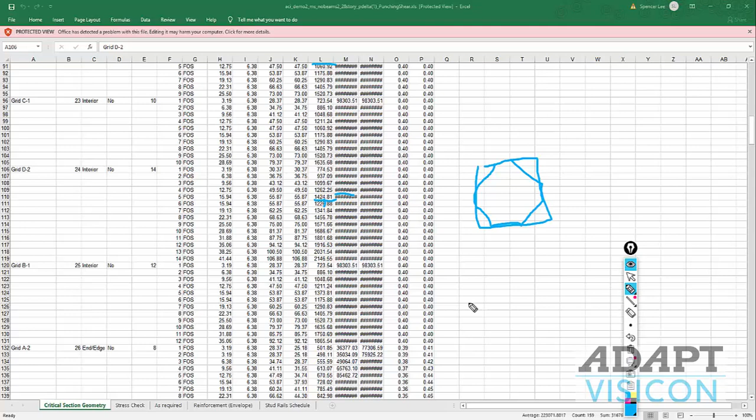And then there's additional checks made beyond that; all the way from 6 through 14 are required in order to get the stress less than 2 square root of f prime c. And that affects the amount of reinforcement being added to this particular design. If you go to the stress check, there's also an indication here that would show us something similar. We can see the program checks the stress based on some allowable, which is indicated in this column here.

If we go all the way back up, this is the allowable stress column. I'll widen that so it's easier to see. And once you get down to section 5 and 6, at 6 we get 0.095, and that's actually repeated. That indicates that this is 2 square root of f prime c. That becomes the allowable stress and the target that we're trying to meet with those octagonally shaped sections.

The third indication would be the area of steel required. Coming down here to column D2 for strength, at section 5, the amount of reinforcement needed based on a rectilinear section is 0. At that point, we recheck it based on the octagonally shaped section, and there's additional reinforcement needed out to layer 14 until we get back to 0, meaning we meet that allowable stress condition of 2 square root of f prime c.

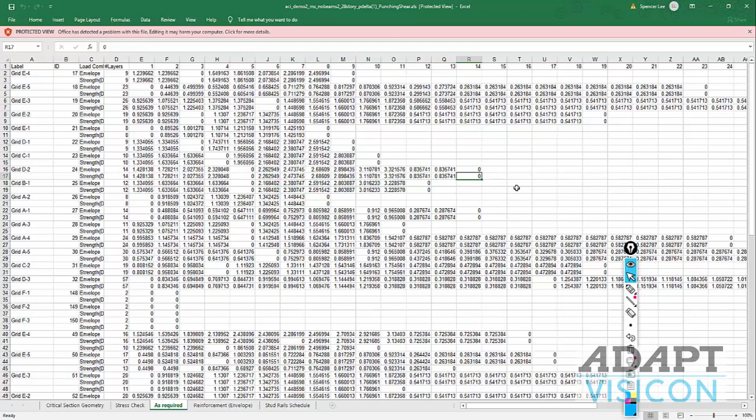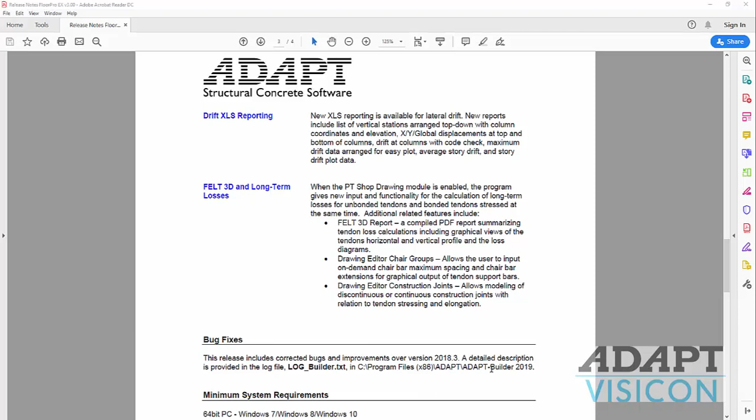The last thing we're going to discuss is the ability to check long-term losses using Felt 3D within the PT Shop module for ADAPT Builder, and also a new tendon shape that can be set as a character for the model tendon. Coming back to our model, if we go to this option to show tendons and we double click on a tendon, there's now 3 modes of drawing the tendon, or how it's represented as an element. There's straight line representation, spline, and also fillet.

This fillet / radius entry allows the program to combine a radius fillet along with straight segments for representing the tendon and the in-plane sweep of a tendon. So that's new for the program. If we look at stressing, under the post-tension design option, there's effective force and calculated force. Those 2 options have been in the program for a while.

We get down here to long-term losses. There's an estimation of long-term loss if the option for calculated force is enabled. This estimation is only applicable when you have the PT Shop module turned off. In other words, the option for explicit calculation of long-term losses is disabled without the functionality of the PT Shop module.

So if I go ahead and close the program, we're going to reopen Builder now with this option for PT Shop / Felt. I'll just reopen that one model. And under tendon now, there's a few new options under the shop drawing module. Number 1, if we go to one tendon or a group of tendons, I can double click on any tendon and change this now to calculate explicit losses for that tendon.

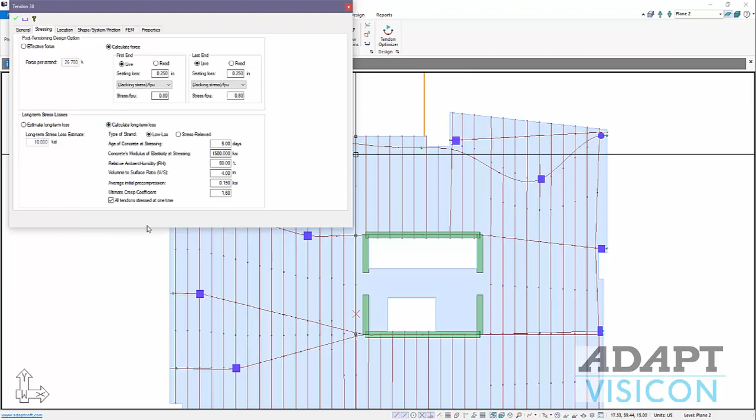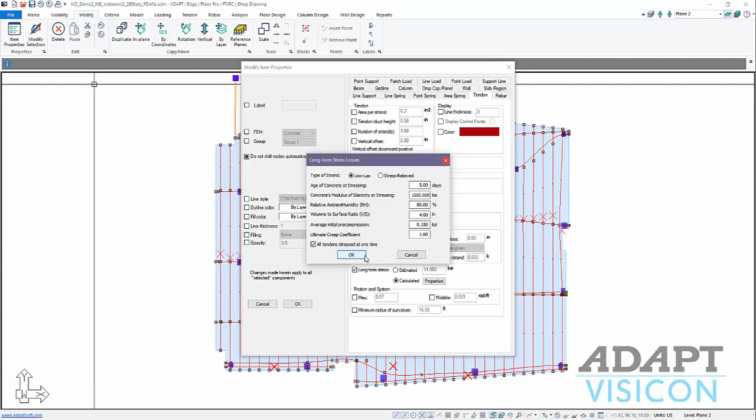I could do this for all tendons in a model. If I select, for example, all tendons in this particular slab, I can modify those tendons. We're first going to designate these as calculated force, and instead of estimating, we're going to calculate the long-term losses based on these properties. This is similar to running individual tendons in ADAPT Felt, but batch processing losses for these tendons. That sets all of my tendons up to be calculated for losses.

If we go back to tendon, I can now run the friction elongation calculation of those tendons, and I can produce reports using the Felt 3D report option for a group of tendons or individually selected tendons. If we use the pull down here for Felt 3D report, this allows for a single strand report, which indicates the losses for one strand even if a group of tendons is modeled.

So for example, if this is set to 7, the same shape would be indicated for all 7 tendons, and we may only want to calculate losses for one of the strands, so the single strand option allows us to do that. If you go to reports, under tendon reports, you can also invoke those reports from the PDF report option for the tendon element.